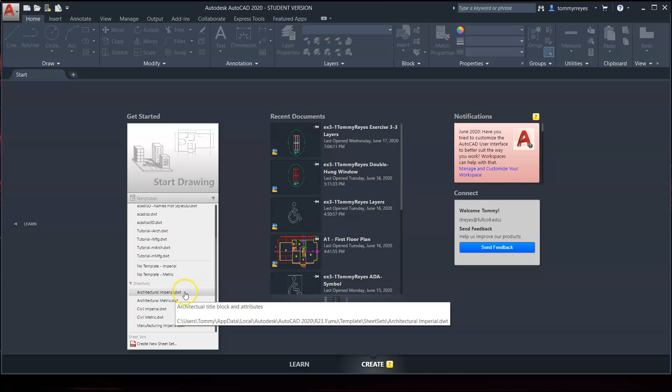On page 4-5, we are looking into opening up the floor plan B drawing. So go to sheet sets down here, architectural imperial template, and we are starting a completely new drawing called floor plan B.

I'm going to go ahead and save this, Control Shift S, and let's label this correctly. So floor plan, or just floor B. And let's go ahead and hit save.

We are in paper space. Let's switch over to model space. Now, the textbook asks you to set the drawing limits, and that limits the amount of working space area to the dimensions that it is given.

I'd advise you to skip that. And so I'm going to skip that. I don't like to be limited. Don't tell me what to do. No, I'm just playing.

The reason why I don't like limits is because it's exactly what it says it does. It limits you to that space. And when you go to do something and it's not working, I don't know. You're welcome to try it out. If you like it, great.

I just like knowing that I have a vast area to work with, and maybe it's helpful for some, but doing what I do every day, we never use limits. It's just something that gets in the way because we do reiteration after reiteration of a floor plan until it actually works. On average, we come up with 5 to 10 different versions of a floor plan until we find one that works perfectly with the client.

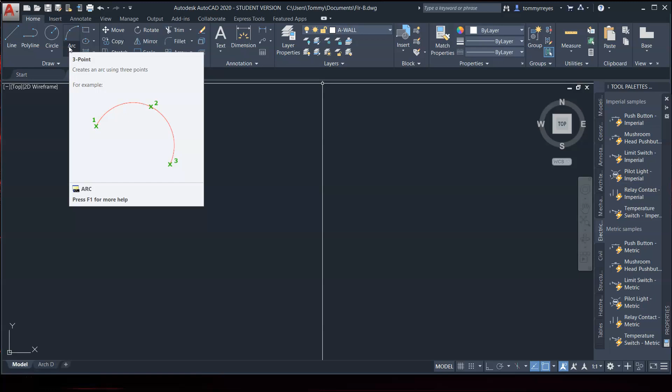Let's make that our current layer. So I went ahead and clicked right here to set this as our current layer. Close out of that. And it looks like it's giving us an option to turn on ortho or polar tracking. I can tell you firsthand that ortho is the way to go for drawing floor plans. So I'm going to go ahead and make sure my ortho is on. Control L. Ortho is on.

And there you go. So this is polar tracking, this is ortho. It's really up to you. I know ortho limits, or reduces the amount of error that could occur when you are drafting floor plans. So go ahead and take a look at page 4-7 at the floor plan.

This is the foundation perimeter basement floor plan. So the black dot in the middle represents the origin. Let's go ahead and get started on this.

And we're going to offset this 8 inches. I'll go ahead and get started and show you how I do it. So, line, and we'll start at the origin. Why not? The book says to start over there. Now we need to go over 32 feet.

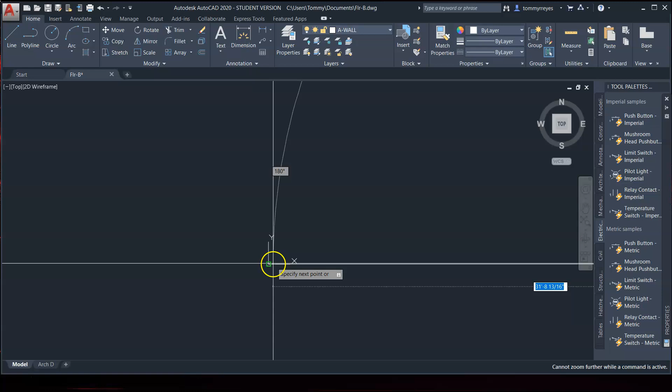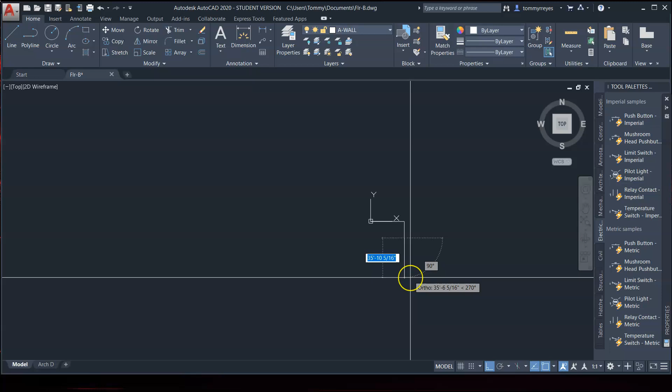Escape, zoom, extents. There we go. Line. Now we need to go down 15.4. And we need to go over this way 1'4", which is also 16 inches.

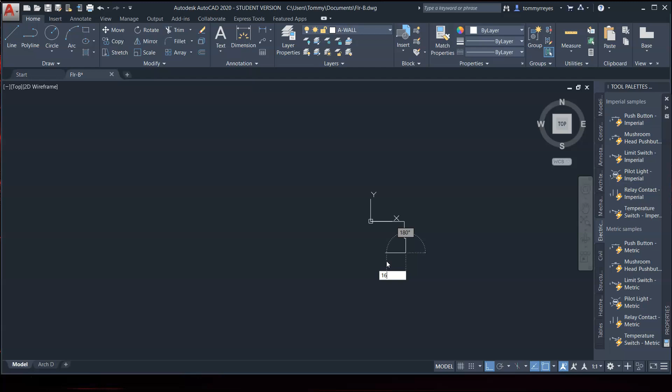Down 13.4. Go over 16 inches. And 15.4. And 9 feet.

And it looks like we need to come down 3 feet. Oops, undo. 36 inches is 3 feet. We need to go over 6 feet, back up 3 feet. So you can see how I'm using a combination of entering conversions and just entering the numbers as is. So I need to go over 33 feet, come back down 8 feet, and then go over. You notice how I'm guiding my mouse as I type, and that's why I'm going so quickly.

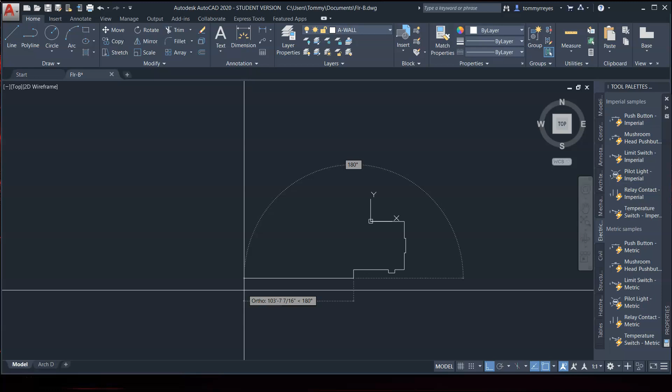I'm looking at the numbers as I go, and before I hit enter, I'm looking at the next number. And then this is 44, and this should close automatically. Spacebar, done. And there we go. Page 4-7 is complete, and we can offset this 8 inches towards the center.

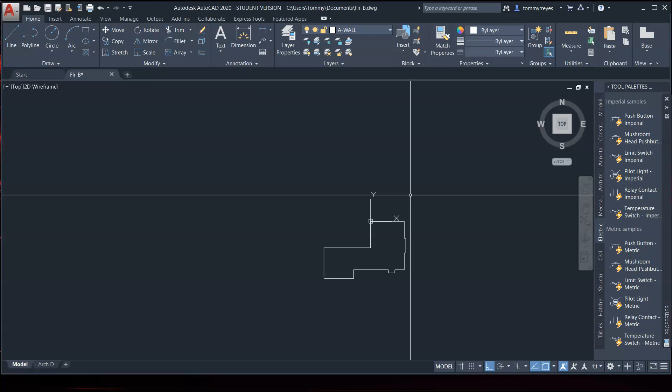Let's go do this. Let me zoom in a little bit. So zoom, extents, offset, specify 8 inches, and just go all the way around. And we're going to clean up this line work. I like to use my zoom to make sure it's easier for me to grab these lines and offset them. Don't worry about the gaps.

The next command we're going to use is fillet. Fillet, F. And we're going to use 0 radius, because what we want to do is, check this out, boom, boom, we want to make these corners, cleaning up these lines. This is a very useful command.

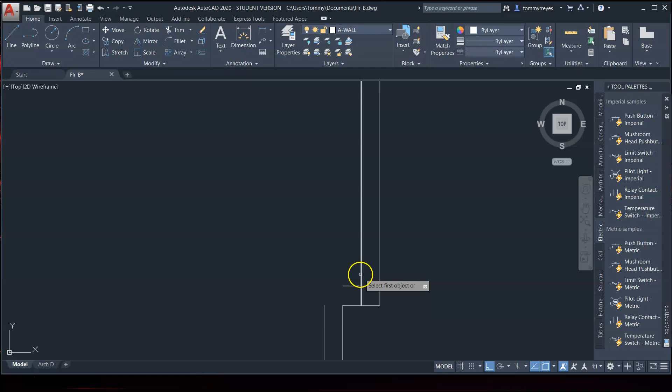Let me start over. So fillet, make sure it's on 0, spacebar. Fillet, spacebar, 0, spacebar, and here we go, bam. Now that I know my previous command was fillet, spacebar again, and this is how I go quick. I don't need to type that command until I'm done, I could just keep going.

Now I'm selecting this line and this line, I want to make a corner. This line and this line to make that corner. It's almost like a trim command and an extend command all in one when you're using the 0 radius. And check it out, we got part of a floor plan. That is the fillet command.

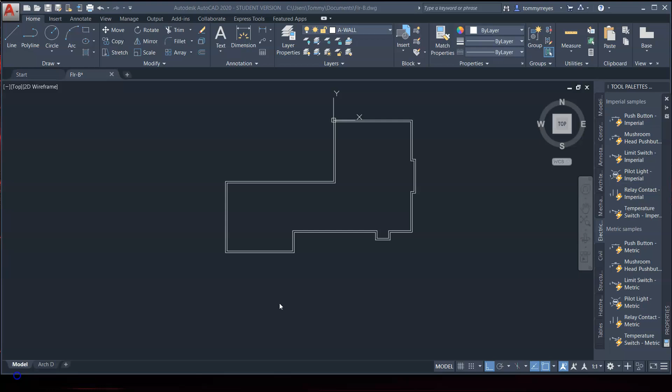Oh, we were supposed to use extend and trim as well, and that's okay. We could have used trim. Let's back this up a little bit. Okay, let's back this up a little bit. We could use trim right here. So this is where we could use trim.

And the book wants you to practice that. Obviously, I showed you a much quicker way to do that. And remember these gaps. Well, here's how you use extend, EX. Select the line you want to extend to here. I'm going to do that here so I can recreate what was once there.

So instead of using the fillet, I could have extended this line to here for practice, and then extend. So I hit the spacebar, extend, and then trim. To me that was too many extra steps. But you can see how you can use it, and that's kind of what I think the book wants to show you. So I use fillet, and to me it makes a much easier way to do that.

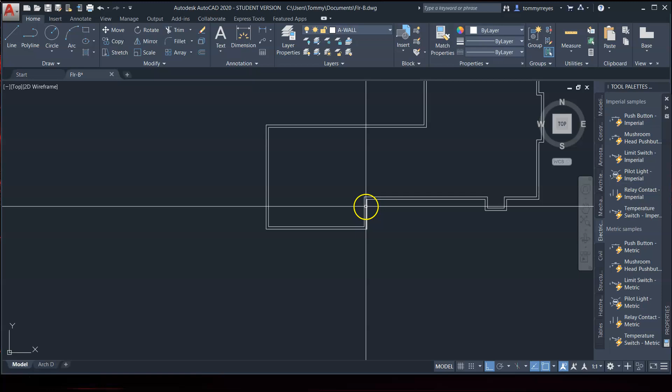So it looks like we are going to extend this wall all the way up, and so now we'll go ahead and use the extend command. So EX, we're going to extend here, spacebar here, here, and then use trim. I hit the spacebar twice, so I can just clean that up. And clean that up, because walls should be continuous. Let's see what else we're doing. Okay, yep, tell me to clean that up.

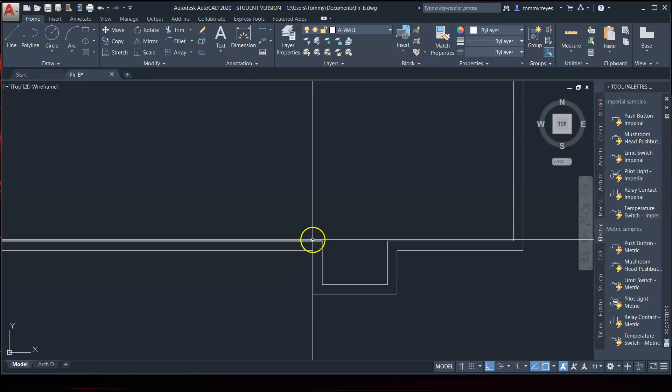And it looks like we are extending this as well. You can use the fillet command, and trim. And that's on page 4-13. So on page 4-15, we're doing a few more things, drawing a few more walls, and it looks like we are going to offset.

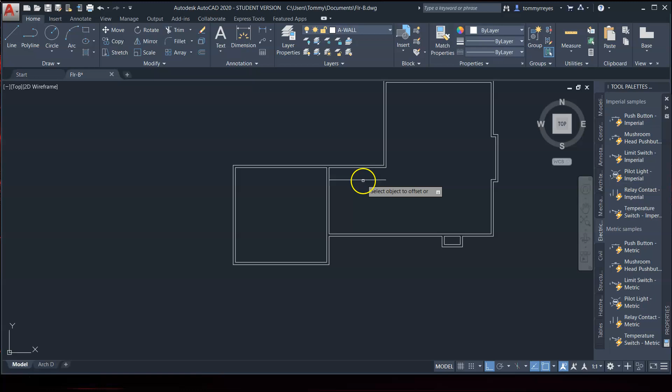3 feet 5.5 inches from here. So offset 3 feet 5.5 inches, enter. And I'm assuming that wall is 4.5 inches because it says so on page 4-15. So offset 4.5 here. And now what I can do is offset this line right here 13.5 inches - or not 13.5 inches, 13.5 feet.

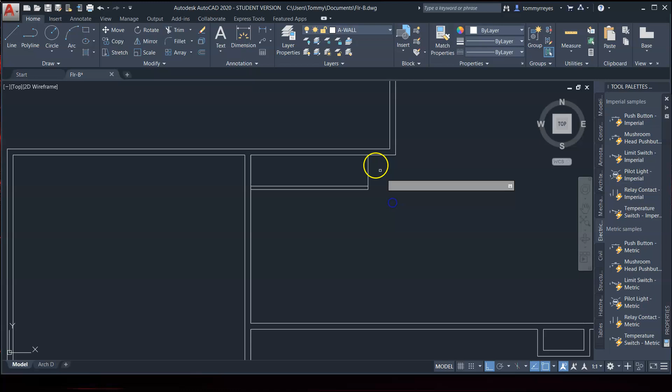So 13.5 feet. There we go, trim, hit the spacebar twice. Made that wall. Let's clean this up right here. Don't forget to clean up your work right here. This is a garage, and some of you might be wondering why this is 8 inches from the garage to the house, and the house has 4.5 inch walls.

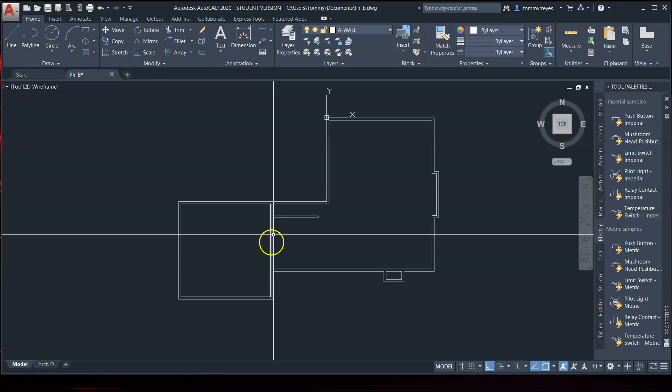That's pretty typical. Typically, your garage will have gas lines in here for your water heater and your washer and dryer, and that's pretty typical. So the thickness of this wall is for fire resistance. You don't want a gas line here and stuff goes off right here. You want to be able to protect the inhabitants long enough for them to safely get out before that. And so this is a fire rated wall that goes all the way from the foundation to the roof.

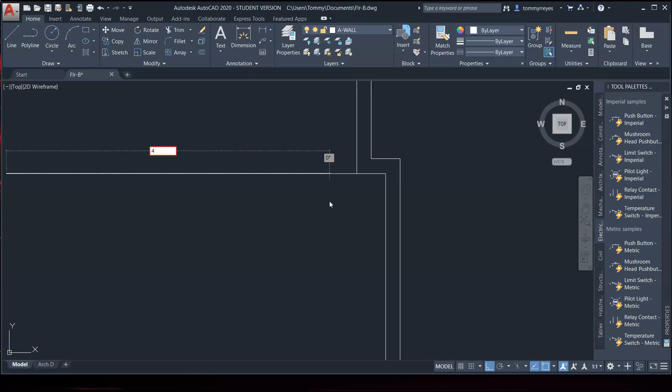Anyway, that's a little on that. So we have right here, this goes out 2 inches. And let's offset this 4.5 inches. Escape.

Deleted everything, my bad. 16. 2. Offset 4.5. And we are going down here 7 feet 1 inch.

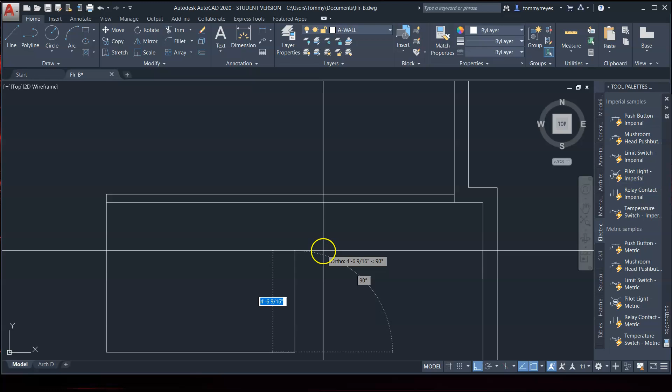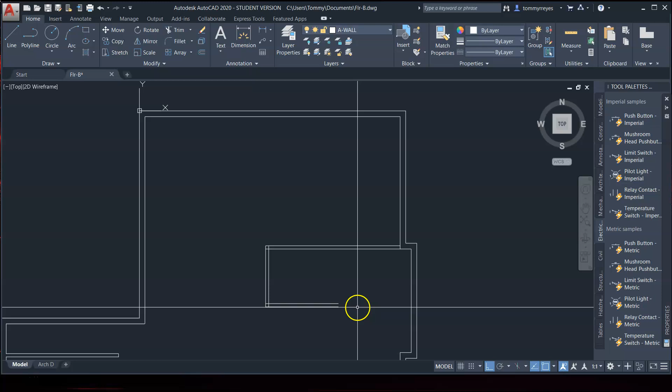Now, I'm going to talk a little bit about why I'm doing this the way I'm doing it. 8 feet 9 inches, there we go. So I did this line first because I knew we were basing this wall off of this line right here, and I could offset that. Now I have the outside of these 3 walls. And now I can offset this 4.5 inches here and here. And now what I could do is, well, I need to make a line here and here.

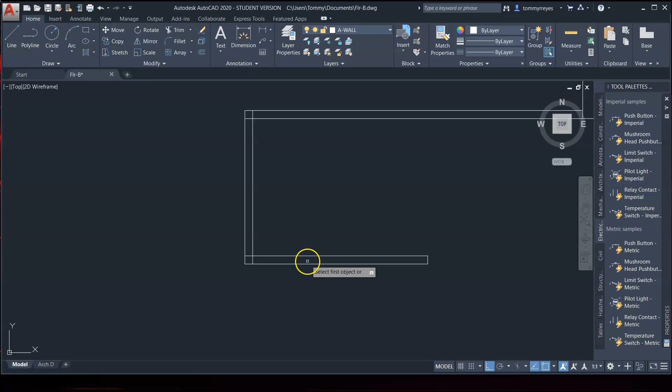And then I could use the fillet radius 0. Oop, what happened here? Fillet radius 0. 0, there we go. And there you go, we clean that up. We need to trim this. Or we could fillet.

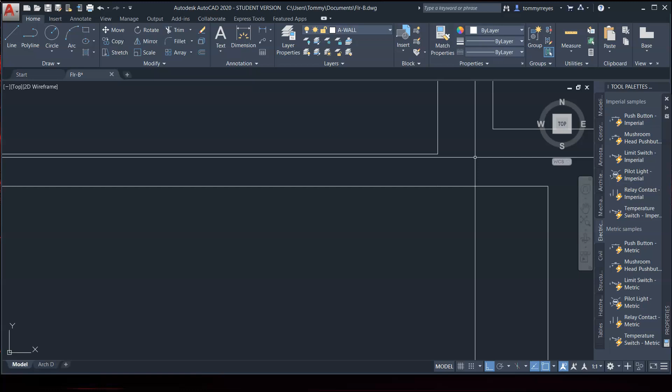I don't know why the book shows that it's still not cleaned up on page 4-15, but it should be cleaned up. All right, and so now that was done. All right, so that's it for part one. We'll go ahead and make a part two.